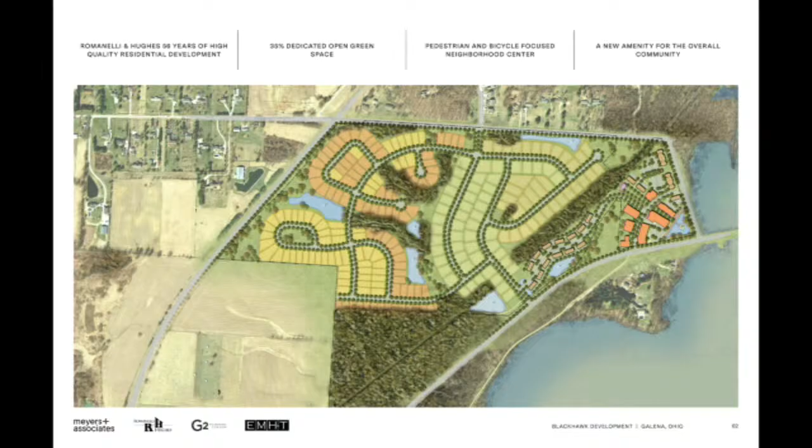Now, I can click, or you need to?

When we look at any property, what we're really evaluating first is the beauty and benefit around us, and how we can exemplify that in the development without creating a burden to the context. We have a spectacular site with natural topography and all that's offered on the north tip of Hoover. We also have this beautiful bird sanctuary and all the bird components surrounding this property. We think Blackhawk is actually a big part of that because of the maturity of the existing landscape. Lastly, there's the cycling component that happens throughout this site.

I'm a cyclist myself, and I ride this trail often. I'll tell you, it's a little treacherous when you come to this spot, coming off of a beautiful scenic pathway.

You have to risk yourself on some roads and then get back onto the trail. One of the things we're going to share with you is how we sort of knit that wound in the path, and we really create a connection between the two ends.

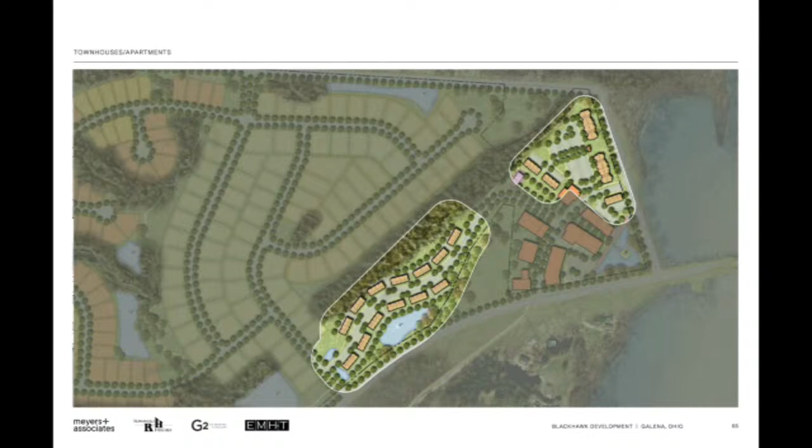This is an image from the air of the southeast portion of this end of the site, looking back at the road path and the density of some of these buildings. You see on the left side the townhouse buildings nestled against the trees, and the other residential buildings up towards the northeast. But now we're going to start to zoom in on a couple of these featured areas.

One of the other key components you see in this drawing, painted green so it's easy to see, is this green pathway. That pathway serves as the connectivity between the walking and bike trails, and I'll show you some renderings of that in a second. The path and walkway becomes a woven line that goes through the development, creating moments of engagement but also allowing continuity for a walker or a cyclist. Let's go to the next slide.

The second area I wanted to touch on is what we're calling the event lawn. This event lawn is on the axis of that main corner, where we have a couple of features we're trying to highlight. In the southeast corner of the development, it's the low portion of the site.

A lot of developers will tell you, hey, we have to deal with stormwater management, adding a bunch of ponds to any property to get the water to work. Well, one of the beauties of this site is it has a lot of natural fall and terrain, so the stormwater works really well, but this is kind of the low corner of the site. So rather than putting in a manicured pond for detention that rises and drops, what we're looking at is creating this feature.

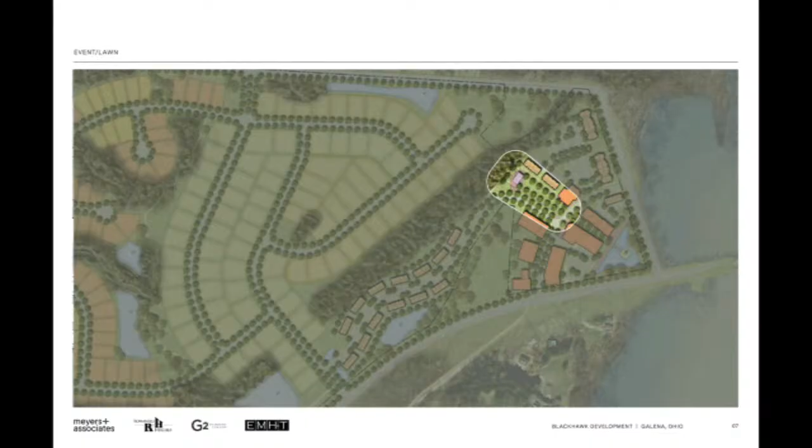Let's go to the next slide. As we zoom in, you see the green space is surrounded by a combination of commercial and residential buildings. The purple building on the end is what we're calling the bicycle or performance depot, reminiscent of the old Galena depot. On one side it opens to the green space, the event lawn, and on the other side it serves as a bit of a rest stop on the bike trail, with a place to get out of the sun, a place to have a seat, take a break, bathrooms, and bike service items.

But on the east side, facing this lawn, what we have is an open space that could be set up for a musician, a farmer's market, or a food truck event. There are a lot of different opportunities to activate this space. Let's go to the next slide.

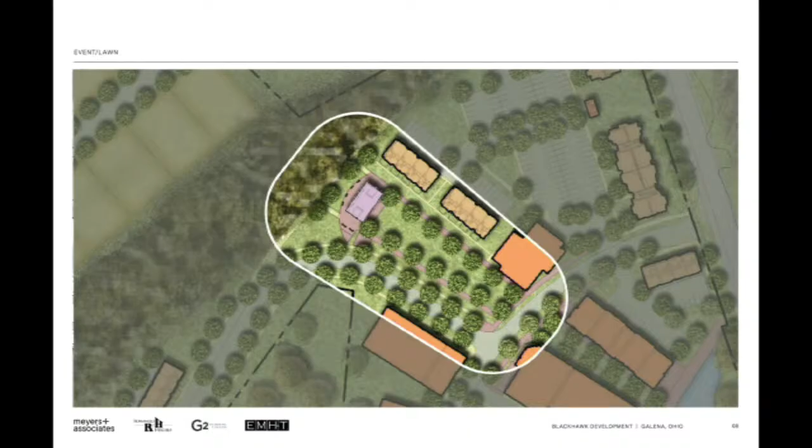The other building is that creamery building. Looking at the right portion of this rendering, we're thinking this creamery building might keep a nostalgic view, but be repurposed to serve as an ice cream parlor or food hall—someplace to grab a bite to eat and then sit on the lawn. You see the depot building over on the left, surrounded by some other residential and commercial buildings. Let's go to the next slide.

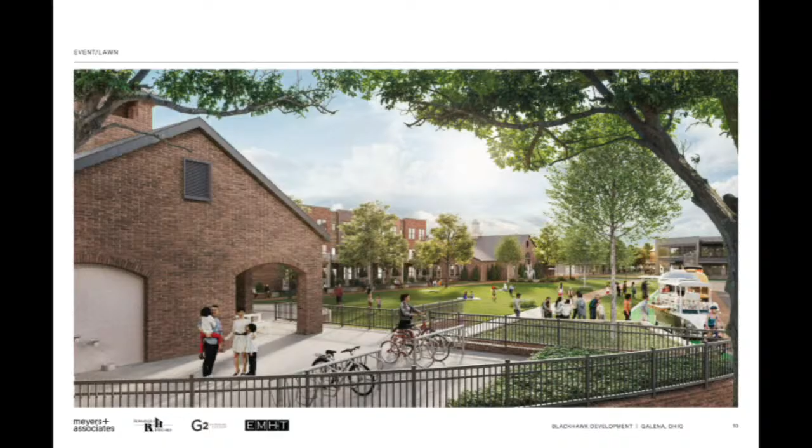So as we zoom in a little closer to that depot building on the left, you can see the size and scale of that event lawn, which serves as a nice open green space for a lot of different uses. We're always looking at these community-based spaces at different times of year, but also different times of day. So this next view is at night.

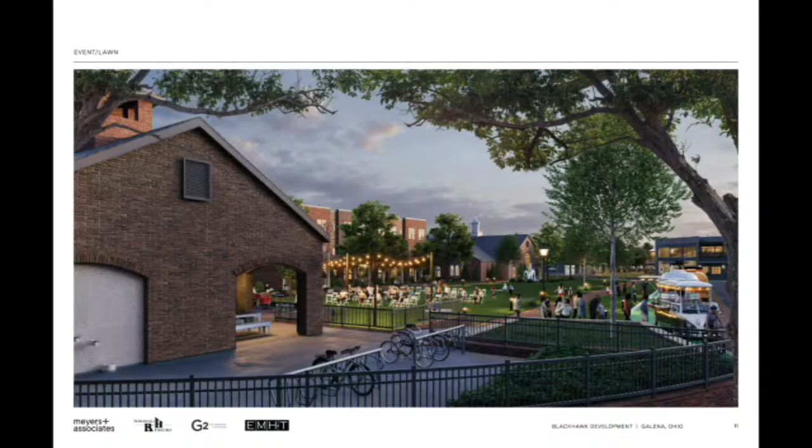We have a lot of sensitivity to the impact this development will have on the surrounding neighborhood. That means everything from dealing with stormwater effectively, to traffic, to noise, to light, making sure we're being good neighbors to everyone around us. We also have a heightened degree of sensitivity here because, going back to those birds, we have conditions surrounding this site that make our environmental impact a little heightened, and we want to be sensitive to that. So controlling lighting and controlling any acoustic noise from this space is something we're concentrating on.

The third area I wanted to share with you is what we're calling the commercial district. These are smaller scale commercial buildings that right now could be a wide variety of offerings. Nothing has been assigned, no one has signed a lease. We're really staging the creation of a planning strategy, and then finding the right tenants or occupants for this development that are also beneficial to the bigger community. We're not looking to create competitive components to things already established here. There's strategy we'll all have to work through, figuring out how to make something successful for all.

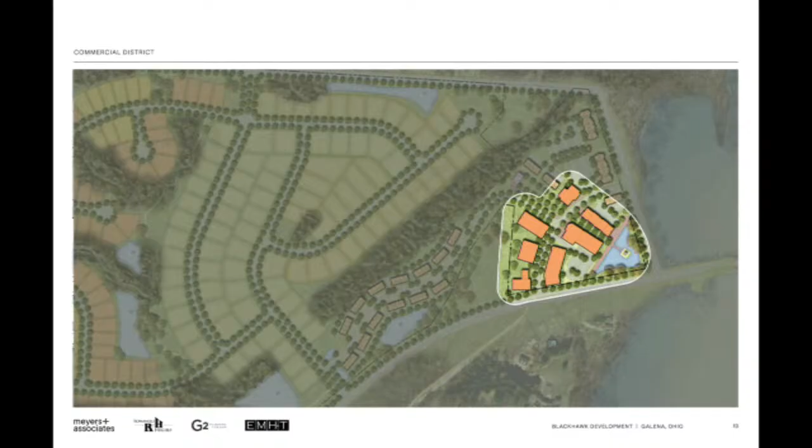When we zoom in, you can see that water tower feature sitting out in the water on the corner, aligned with the depot building and the event lawn you see in the top middle off of the frame.

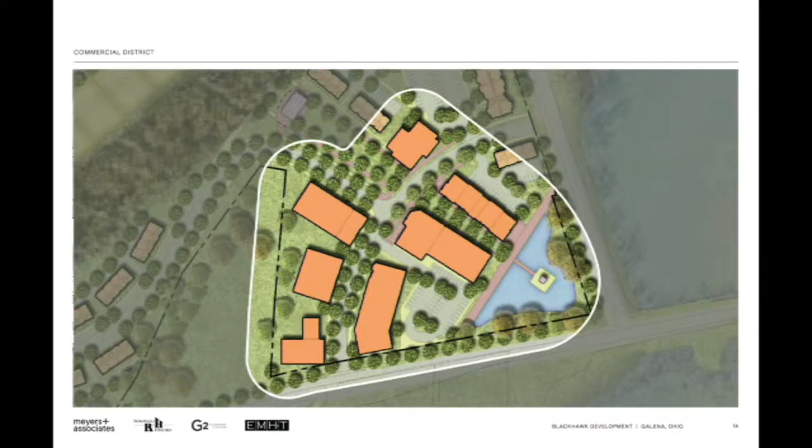As we started, this is the first concept—it's a vision, an idea. We're eager to gain your feedback and hear your thoughts. I know we're planning to be back in front of you in the very near future with developed designs for buildings, incorporating a lot of the feedback we receive tonight. We're anxious and eager to hear your thoughts. Thank you very much for your time.

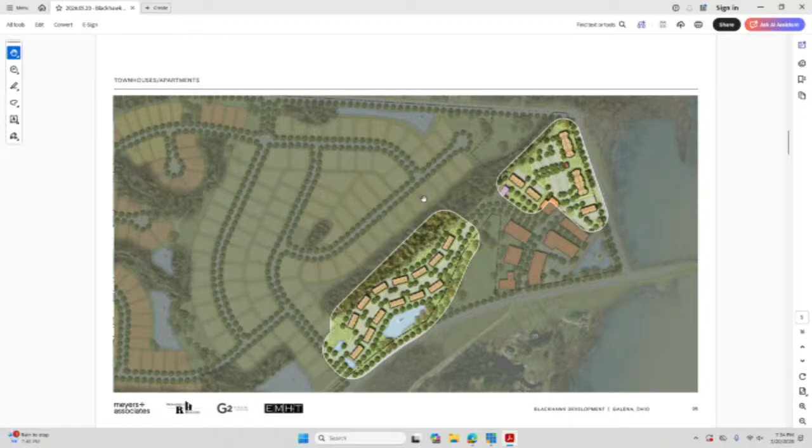The other thing we looked at when we looked at the plan itself is that trail system connecting here, how do we bring that back through. Maybe it's a loop to get you on the major system, maybe it's coming through here, but we're trying to get connectivity through the site. The same thing here, instead of going back onto the street, we're trying to utilize this bridge. We've already been out there to see if we can come right along that railroad bed and connect in here.

The other thing we talked about is how do we bring a connection along the front and tie it into our commercial center and our recreational center as well. So putting paths along the front and meandering them through to get back into this area, so there's more connectivity for even neighboring communities too. So those are all things we've been working on.

Before you sit down, Jim, can you also talk about access, all the access points in and out? So from this, this is about where the old clubhouse is, so this will be an access point into the community. If you look at how we've designed this site, everything over here is focused on our move-down empty nester buyer. We've got a combination of 62 and 70 foot home sites that are going to be in here.

These are our high-end ranch, our 62 foot lots, going to start probably around the 900s. Our 70s are probably 1.1. I can give you examples of communities where we've done this throughout Central Ohio. We really try to keep that separate from the rest of the community, and the reason is that buyer doesn't want to worry about little Tykes toys and kids going into their community. It's going to be an all self-sufficient community, we'll mow the yards, manicure, take care of everything in the community itself.